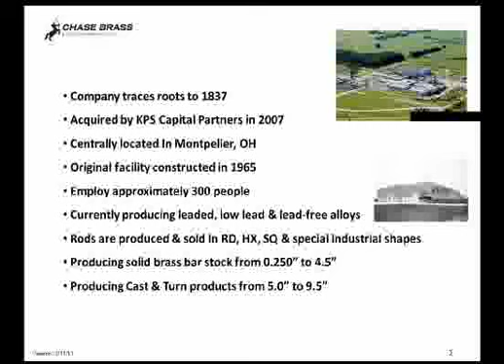When this facility was originally constructed, along with all the advancements and automation added, initially the focus was to really make one product, Alloy 360, and make it in large volume and very efficiently. As the industry has evolved over the last 40+ years, the dynamics affecting that need for product and the legislation impacting our industry have been substantial. And so what I'll do now is turn it over to Larry Muller and let him really focus on those legislative issues that are affecting our world and ultimately your customers' worlds, and what we're doing to help provide solutions to meet those challenges.

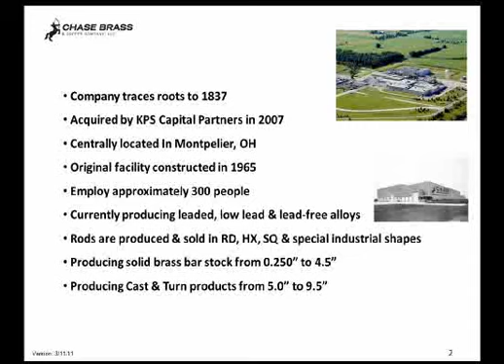The drivers of change are getting to be kind of a long and complicated list on a timeline here. The best way that we could figure to present this busy subject matter of all the activity that's occurred over the last 5 years was to get you to just focus on the different areas where change has occurred. Federal legislation, which I hope is self-explanatory, affecting every product that's made in the U.S. Then there's the legislation enacted by the states to control the product that is supplied to commerce in their state.

And then there's voluntary standards, which are the requirements created by industry groups that are comprised of a balanced level of users and producers, and either make or change standards in reaction to federal and state legislation, or to meet a need that they don't believe will be covered by states or nationally, but still needs to be incorporated in products that are sold to consumers.

The other way that we're trying to make this a little bit simpler to understand is to forget a lot of the interstitial material and just have you focus on the red items, which represent the culmination of the changes that have occurred in the past. So let's start at the bottom of the table, and we'll go through the highlight items first, and then we'll talk about them in a little more detail in the following slides.

Over the course of time, beginning with the Safe Drinking Water Act in 1986, a lot of companies stopped using high lead alloy castings or high lead content brass alloy castings and shifted to brass rod with a lower lead content. In addition, in order to meet the 15 parts per billion of the lead and copper rule, they started to use surface treatments to remove surface lead, so that in that standard laboratory test that's conducted by a number of certification agencies, they would be able to pass the 15 parts per billion and hopefully prepare them for the 5 parts per billion lead leachate that's required in NSF 61.

Regardless of what material they choose, ultimately these companies which make faucets, valves, and fittings have to comply with federal, state, and voluntary standard requirements, which tell them what to use and how to use them in the grand scale of things. If there's one piece of good news for manufacturers from all of this, at least now with the national legislation passed, S3874, they're dealing with a national standard instead of facing a jumble of individual state standards. Although there's still a possibility that if states want to go to tighter standards, they can do so.

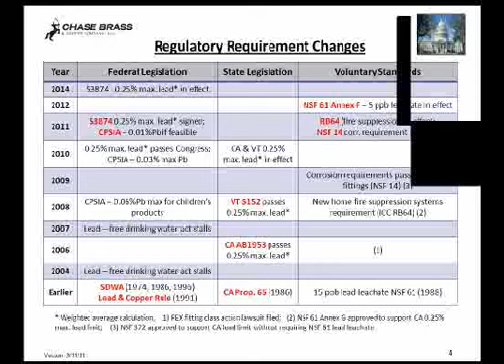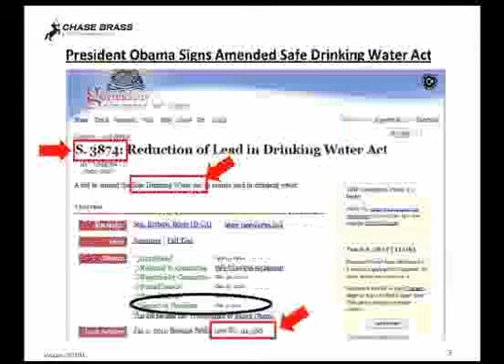To look at a little more detail on some of these various pieces of legislation or standards, we don't really know what people or customers will end up calling the national law. It could be S3874. It could be the Safe Drinking Water Act. It could be law number 111-380. Regardless, the important thing to know is that it was signed on January 4th of 2011. It restricts the amount of lead, as we mentioned, to 0.25% weighted average maximum, and it goes into effect 3 years after the date of signing.

So January 4th of 2014 will be the effective date for the national legislation, and that delay was requested in order to give companies time to transition all of the product that they were making for states besides California and Vermont to meet the requirements across all 50 states.

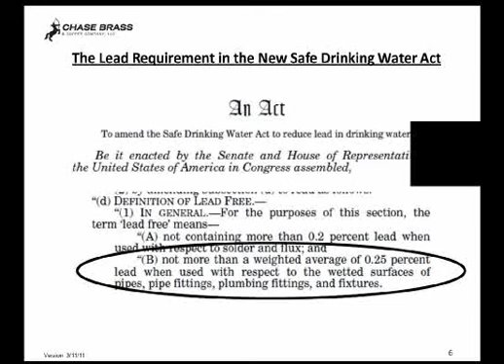The important part of the legislation that affects the products that we're talking about today is shown in the oval here. That the term lead-free means that there's no more than a weighted average of 0.25% lead when used with respect to the wetted surfaces of pipes, pipe fittings, plumbing fittings, and fixtures. And what that means is shown in the NSF 372, that was developed in order to help explain first the California requirement for a quarter percent weighted average maximum, and now the national legislation.

The particular requirement of this standard, though, also indicates that no matter what you do to the surface to reduce the amount of lead that's in touch with the water, or if you put a coating on there, that's disqualified from the calculation. They use the bulk material's lead content for the calculation, and these other types of treatments are not considered part of what has to be done.

And Larry, I think that's an important comment to make a distinction of. Previous to the California and Vermont legislation, which ultimately drove this national legislation, most of the requirements related to our customers' products were leachate and therefore performance-driven. So they could get away with coatings or washes typically to still be compliant. This evolution of this legislation really is saying they are very focused on the content of the metal, more a prescriptive-based legislation as opposed to a performance-based legislation. So this has been a substantial impact and deviation from what our customers have previously had to deal with compared to today.

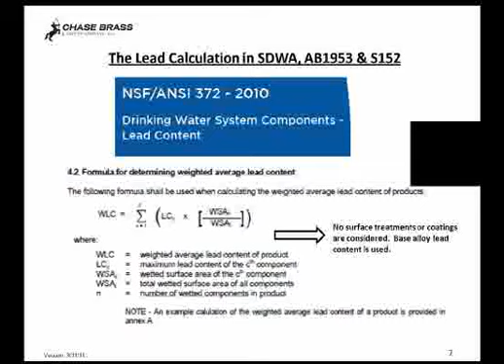NSF 61, we talked about. NSF used to stand for the National Sanitation Foundation. They're involved in the certification of lots of different things. If you look on food processing equipment, for example, much less these individual water components, you'll see the NSF stamp

on them. And this requirement to drop, as it shows in the oval at the bottom, the amount of lead that can leach into drinking water in their standard laboratory test from 15 parts per billion to 5 parts per billion was first voted in 2007, but producers were given 5 years to comply.

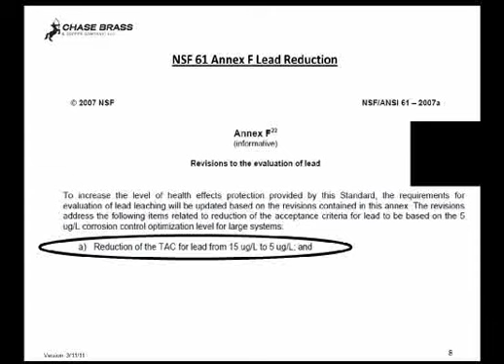And the hope here was that by having a tighter lead leachate requirement, that would supersede any form of additional state or federal requirements. But as you can see now, there's the double impact of 5 parts per billion and that weighted average lead maximum of 0.25%.

The types of materials that are used for PEX fittings, as a result of some significant field failures over the last few years, now incorporates a dezincification resistance requirement as shown in the upper oval here. And that means that in a standardized international type test, parts cannot exceed 200 microns in depth, and that's 0.008 of an inch in that standardized test. If it does so, then it fails.

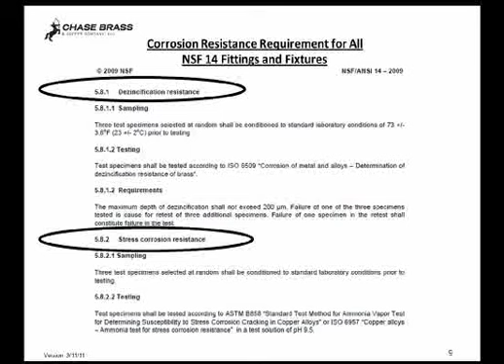That same material cannot show any proclivity towards stress corrosion cracking in a standardized stress corrosion cracking test. We'll talk about that a little bit more. But what that means is that in stress corrosion cracking, when you have a combination of stress, high levels of stress, and then an environment that attacks the grain boundaries of the material, and

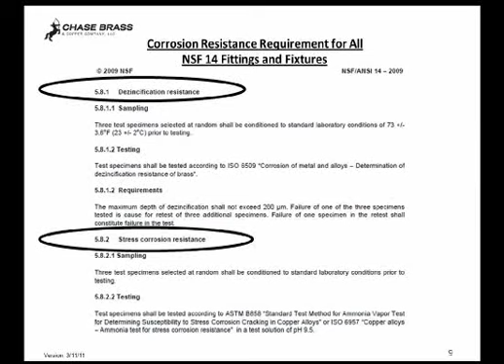in this case, when we're talking about copper alloys, that's ammonia or amines, think Windex, it will cause the part to crack in a very short period of time, whereas in the absence of either one of those two factors, it won't crack. And the things that affect the amount of stress that a part's under is how the material is produced, how the parts are produced from that material, and then the installation of those parts.

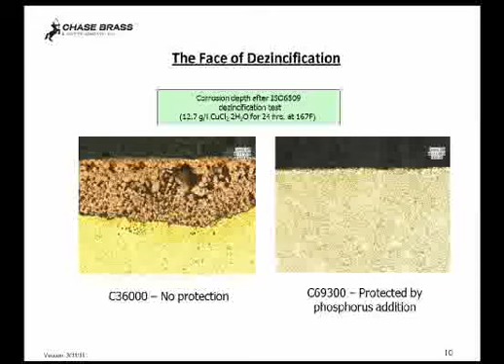Dezincification resistance is a little bit easier to show. And when you have no inherent protection of the material through its chemistry, what you can see under certain conditions is that the zinc will selectively leach from the brass and leave behind a spongy copper layer. NSF 14, as we said, allows no more than a 200 micron or 0.008 of an inch depth of corrosion in this standardized test, ISO 6509, before a part is considered to have failed.

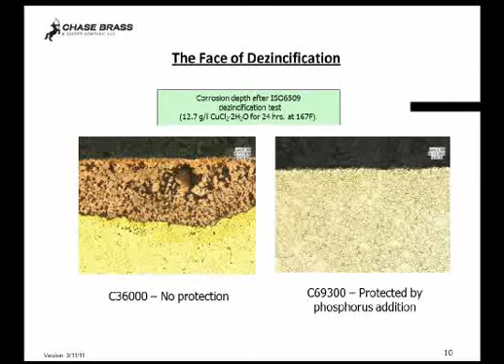Brasses can be protected from this kind of dezincification corrosion either by reducing the zinc content to below 15%, but that makes it a lot harder to produce, or by adding an element that protects the brass, like the phosphorus content in alloy 693, or arsenic, for example, in alloy 35330. Those types of alloying addition protections work only as long as the zinc content in the alloy is below 36% and the proper alloy and manufacturing controls are in place.

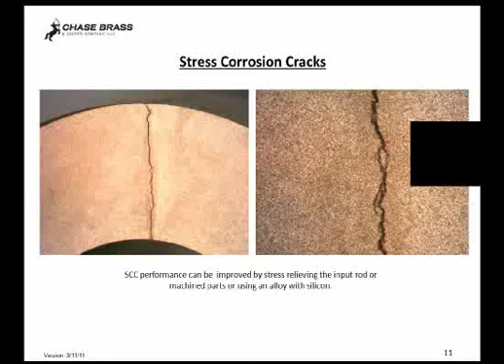NSF 14 requires that materials that are used for PEX fittings have the kind of alloy composition that resists both forms, either stress corrosion cracking or dezincification, just as a summary. Stress corrosion cracking performance can also be improved if you stress relieve either the input material, the input rod or forging, or if you stress relieve the machined parts to take the stresses out of the whole manufacturing operation, or by using, as we can show, alloys that contain silicon, which is a known stress corrosion cracking improvement addition.

We talked about fire sprinklers in the home, and effective January 1st, municipalities have to start writing this International Code Council requirement, RB 64, into their municipal codes that say that 1- and 2-family homes have to start to contain fire sprinklers. That means PEX fittings.

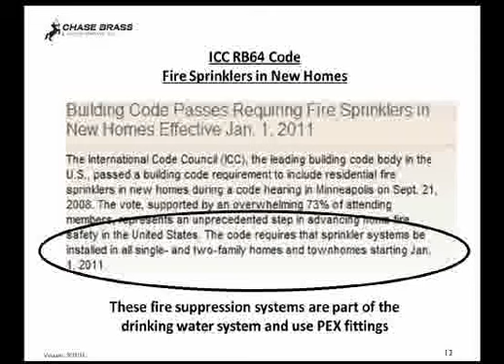So PEX fittings means that you have to meet those corrosion requirements that we just talked about, but because they're part of your drinking water system, they also have to pass the national legislation for the maximum weighted average lead content and the 5 part per billion lead leachate requirement. So there's all of those requirements on it, plus since it's part of a fire protection system, there are also some UL requirements that are even more stringent regarding the corrosion resistance of the materials that are used.

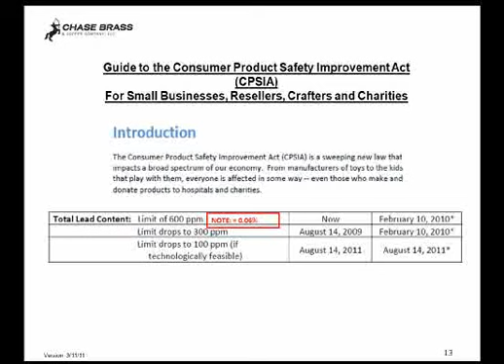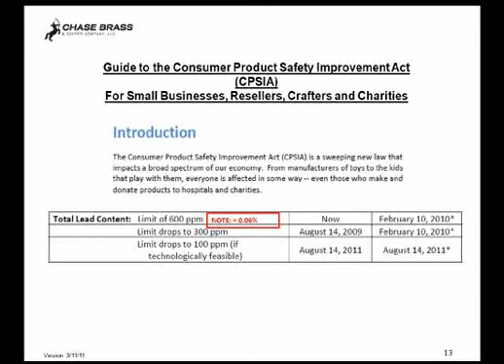And then finally, there's the Consumer Product Safety Improvement Act, which began in 2008 and had a maximum limit of lead in children's products, children aged 12 and under, and dropped the maximum lead content from 0.06% to 0.03% in February 2010. And then on February 16th of this year, there was a public hearing to discuss the technological feasibility of dropping the maximum lead content to 0.01% or 100 parts per million.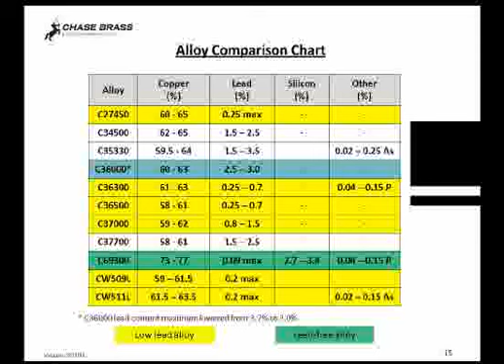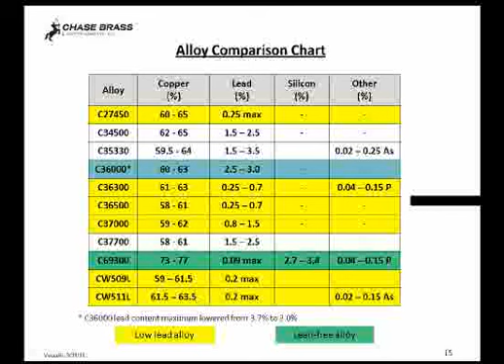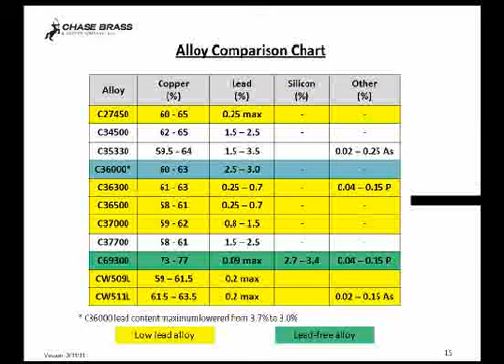There are some dezincification-resistant alloys in this table, 35330, which contains arsenic and has a relatively low zinc content by virtue of the higher copper level. There's a European alloy, CW511L, which contains arsenic. There's a 693 alloy, which contains phosphorus. Alloy 363, which contains phosphorus. And potentially those alloys can be used in some of these NSF-14 controlled applications.

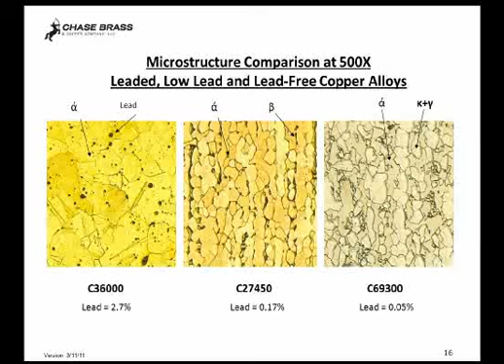And then you get to some of the lead-free alloys, in this particular case 693 with 0.05% lead, there's no lead to see. And where in alloy 360 the lead particles break up the chips during machining, in alloy 693 and other lead-free alloys, there's something else in there to break up the chips. In this particular case, you have the lighter colored kappa and gamma phase that help break up the chips. There's other alloys that might contain bismuth or tellurium, and those would be present as discrete particles in the matrix and break up the chips for those particular alloys.

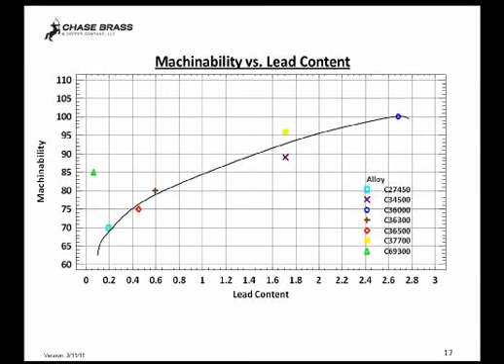But the thing that isn't obvious from this is that once you get away from using alloy 360, which was the high-leaded predominant alloy, there are a number of differences that have to be recognized and adapted to regarding machining practices and even corrosion behavior that mean that it's not just an automatic switch for a user of alloy 360 to some of these other either low-leaded alloys or lead-free alloys.

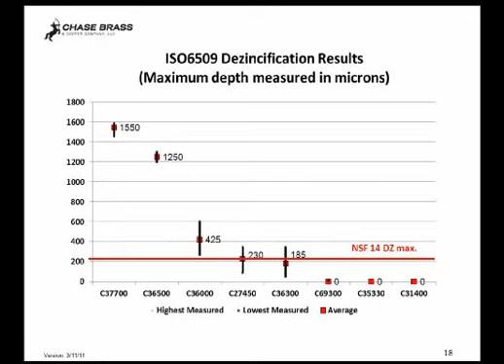The alloy selection has to consider if there's any corrosion-resistant requirements for the application and whether the new material can meet those corrosion requirements. So, for example, for NSF 14 applications, you have 3 alloys that meet the maximum 200 micron dezincification depth pretty handily, and then you have other alloys that can occasionally show dezincification levels above that 200 maximum, and then you have other alloys that just plain don't meet it at all, including the industry standard alloy 360, which works fine and has worked fine for decades, but now is disqualified from consideration for NSF 14 applications.

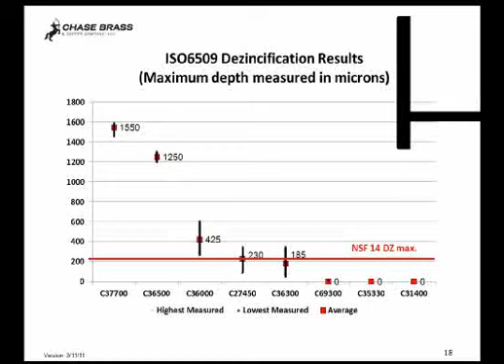There has been a proposal to put that same sort of dezincification resistance standard into NSF 61 for drinking water components, where the main concern in the past had been 15 parts per billion lead leachate. Now it's going to be 5 parts per billion in 2012, and there's a committee looking to see whether it's appropriate to put that same dezincification resistance requirement for NSF 14 into 61.

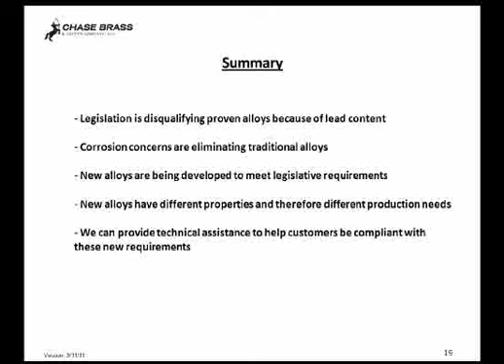So technically speaking, there you have it. Legislation's disqualifying proven alloys because of its lead content. Corrosion concerns are likewise eliminating traditional alloys because they cannot meet the NSF 14 requirement. But new alloys are being developed to meet these legislative requirements. But you have to consider that they've got different properties, different production needs, plus they need to be tested to ensure that they meet any other requirements outside of just the lead consideration.

We use information like this to provide technical assistance to help customers to be compliant with these new requirements, but there's only so much that we can provide. At some point, then, users of these different alloys have to do their own in-house testing or the testing that's required by third-party certifiers to make sure that they meet all the needs.

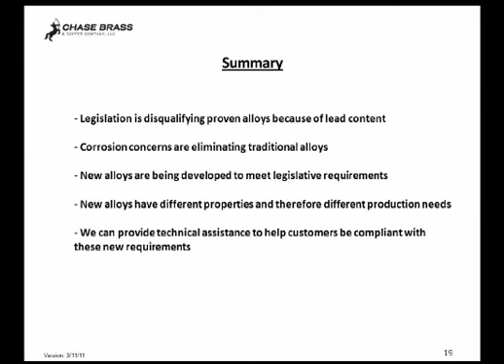As you can see, part of the challenge we're facing as a brass rod producer is the standard vanilla that we love to produce is under constant pressure, whether due to lead legislation or corrosion resistance legislation or a variety of others. And so we're quickly having to go from vanilla only to Baskin-Robbins as far as making a multitude of products. We're working hard to identify new options and alloys that will meet these requirements, but we're really a production facility, not an R&D facility, so it's hard to make a small batch of anything for a trial. But we are working closely with customers to do that, and that is our plan to continue to do that.

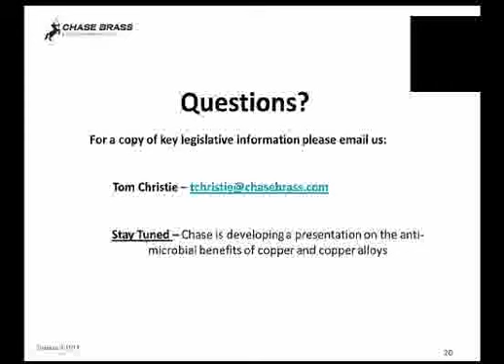Oh, here's a question. Do you know if the brass industry was represented in Congress as these laws were being discussed and so forth? Yeah, I believe that the Copper and Brass Fab Council had a representative there. The California Metals Coalition had representation for the AB 1953 work. I believe that's it. Okay.

All right. Any other questions for Tom and Larry this morning? Okay. It looks like there are no more questions right now. So unless there's something in addition that the two of you would like to add at this point?